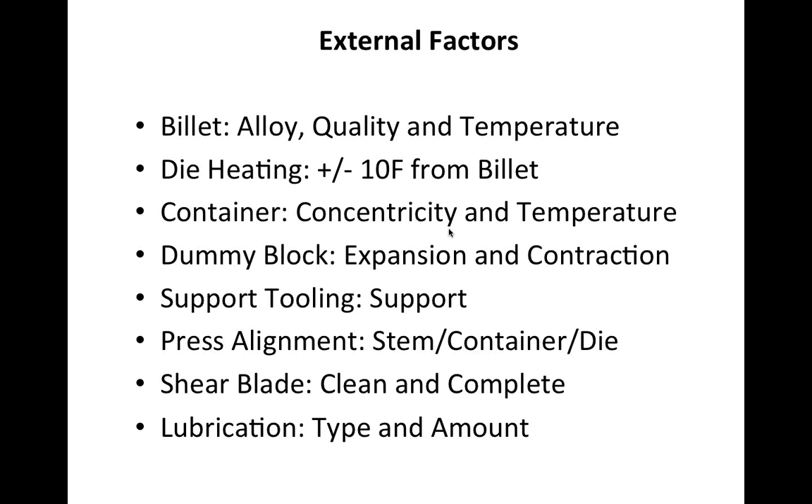Ken, you can talk about billets. So the choice of the billets depends on the application that you would like to use. What determines the application is the wall thickness, the corrosion environment, or ductility of the part that you want to extrude. So that will determine what kind of alloys - 1000, 3000, 6000, or 7000 series alloys.

And for the billet, here are just a quick samples of alloys. For 3000 series alloys, a lot of people who extrude micro tubing will need to use 3000 series alloys because of the wall thickness they are dictated to. For 6000 series, which is more general application - you extrude a lot of it for windows and doors - it's very easy to extrude the 6000 series alloys. And for some high-strength applications, you will look for 7000 series alloys for aerospace and automotives. But there is a minimum wall you can extrude through that 7000 series alloy as well. So it all depends on applications, then it will determine the alloys you should use.

Okay, a couple other things that come in this is the length of the billet. It's not only the alloy of the billet, but also the length. And the length very often is dependent on the table size, extrusion ratio, and the finish size of your actual extrusions that you're selling to your customers so we get the best recovery.

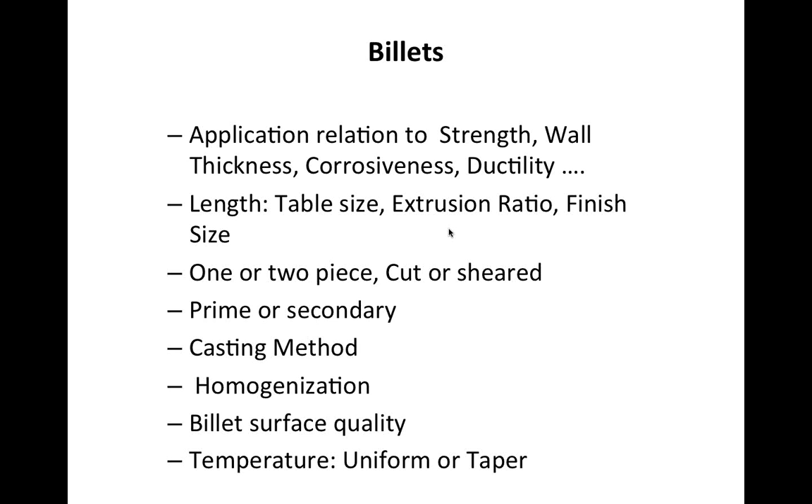One quick thing I'd just like to touch on.

What most extruders realize is that if you're extruding 6000 series alloy and a customer wants to extrude a 10 thou wall, or probably a 9 thou wall, it's impossible to extrude that size wall with 6000. That takes us to maybe a 3000 or 1000 series alloy, which has a lower flow stress and will allow us to extrude a thinner wall.

As tooling vendors, the thickness or aperture between the dummy block and the container wall is very similar to the aperture in the die. So when we go from a 6000 series to a 3000 series alloy and reduce our minimum wall thickness from maybe 25 thou to 10 thou, the critical gap between the dummy block and container wall also changes. Getting a dummy block and liner to operate together as a set is much more difficult when you go to softer alloys.

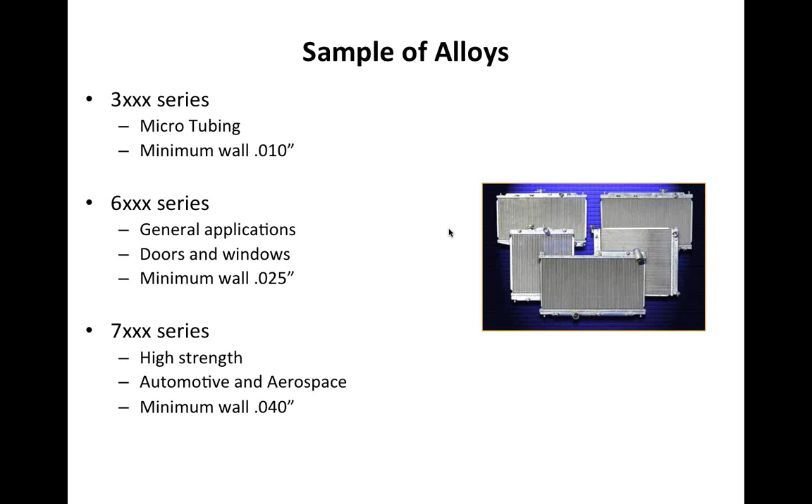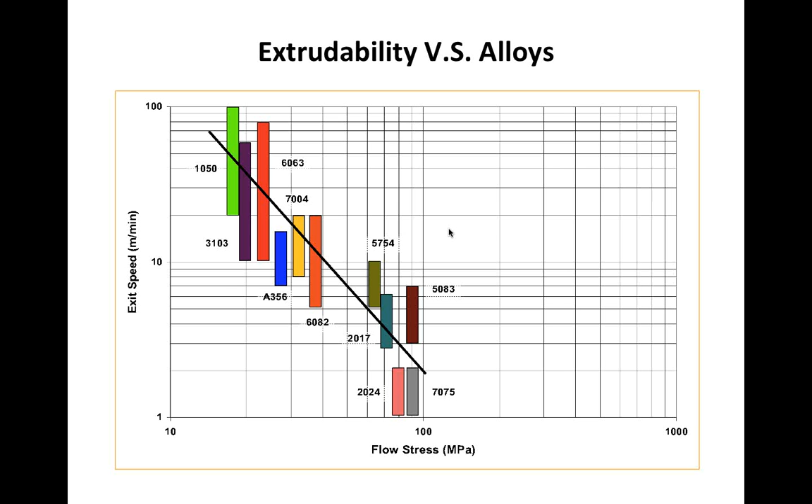So this graph shows you the trend from soft alloy 1000 to hard alloy 7000 series, and their flow stress and extrudability relationships. You're better at that than I am.

Billet homogenization - we won't take much time on it because I'm sure most extruders do homogenize. But if we want to evenly distribute alloy elements, Ken has his PhD in metallurgy and he'd probably speak better at this than myself.

The alloy you have is not pure aluminum, you have all sorts of different elements inside, and what you want to do is nicely dissolve those elements into the aluminum. So you need to evenly distribute the elements, then give it time and temperature, which we call homogenization. What happens when you don't do it is you don't have a uniform property of the alloy, and you have an inferior surface.

Usually on the surface it has high iron content, and because of that high iron content and different uniformity between the surface and core of the billet, there's a strength difference during extrusion. What happens is you get premature tearing at low speed, and you just cannot get the high strength and high hardness through a non-uniform alloy.

At the end of the day, if you don't homogenize it, you are going to lose productivity for sure. No matter how you do it, you don't have a good product to start with, you're going to lose your productivity. So whatever our extruder from two weeks ago hoped to save through not homogenizing, he was definitely losing on both ram speed and recovery.

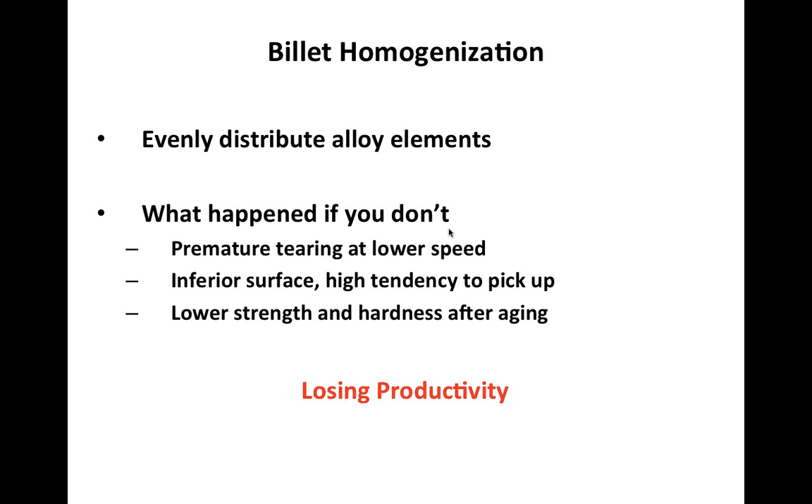Accuracy of billet temperature - the billet temperature has to be within plus or minus 10 degrees of our target. In today's world and with the capabilities of equipment, there's no excuse for not having a billet within 10 degrees of target. As the billet becomes colder, it's harder to extrude because the flow stress of the billet increases. If we want to optimize our ram speed, we have to have control over billet temperature.

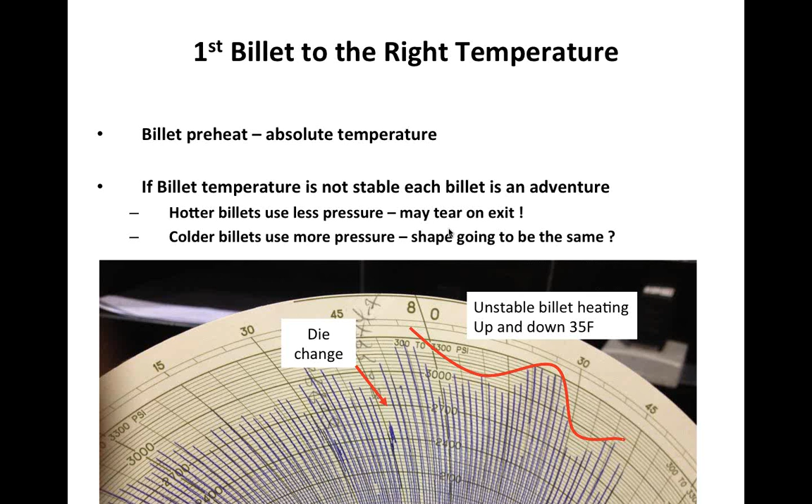Billet taper heating - the goal of every extruder is isothermal extrusion, meaning we'd like to have an optimum and stable exit temperature from the extrusion press. If we start with a uniformly heated billet, the only way to get a stable and uniform exit temperature is by varying our ram speed. But if we vary our ram speed too much, we're also going to change the deflection of the die and the opening in the aperture, which changes our shape, wall thickness, and speed of aluminum flow through the die. So it's virtually impossible today to have isothermal extrusion at 100% ram speed.

So the only other way to do it is to taper heat the billet. And I just saw we did it in Celsius instead of Fahrenheit.

Most of the new presses offered today offer a maximum of 100 degrees Fahrenheit taper in a billet, or 50 degrees Celsius. The reality is to attain isothermal extrusion today, we're looking at tapers anywhere from 100 up to 300 degrees Fahrenheit. I would say 300 degrees is extreme, but there are extruders today using up to a 300 degree taper on the billet.

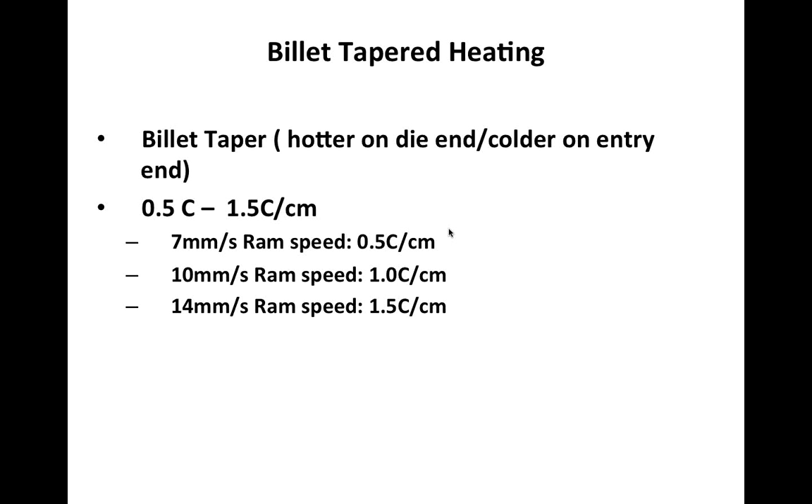Die heating: we would like to have the die plus or minus 10 degrees Fahrenheit from the billet temperature for the first push. If the die is colder than the billet, it means that you're going to increase the stress on the die and create scrap.

So temperature matters. On the other side, if the die is inconsistent from top to bottom or left to right, the flow rate through the die will be different, which means that the shape and wall thickness will also be distorted from what we want.

We know that H13 or 2344 anneals at about 1,085 degrees Fahrenheit, and we know that the nitride layer on the die bearing starts to degrade about 1,098 degrees. So when we're heating the die, we want to make sure that we never go above these temperatures.

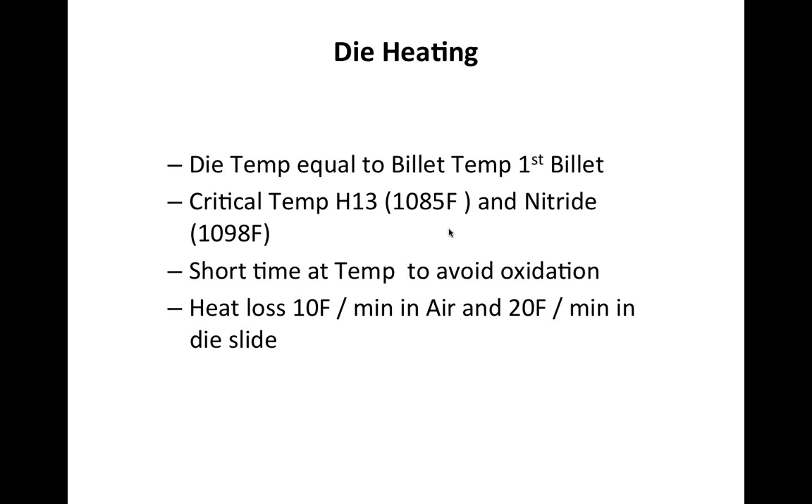Unfortunately, more than 50% of the global extruders today still use chest ovens. And the reality is, to heat a die in a chest oven, we have very little, if any, control over temperature. The majority of these dies are left at temperature for too long, causing oxidation and surface finish problems.

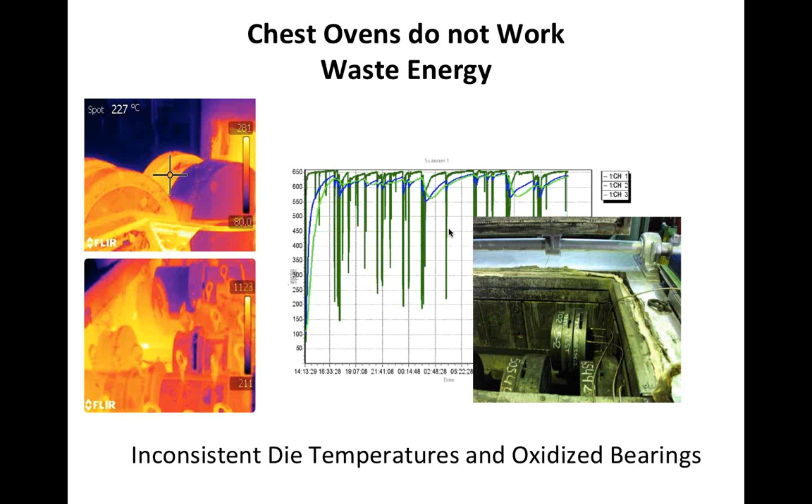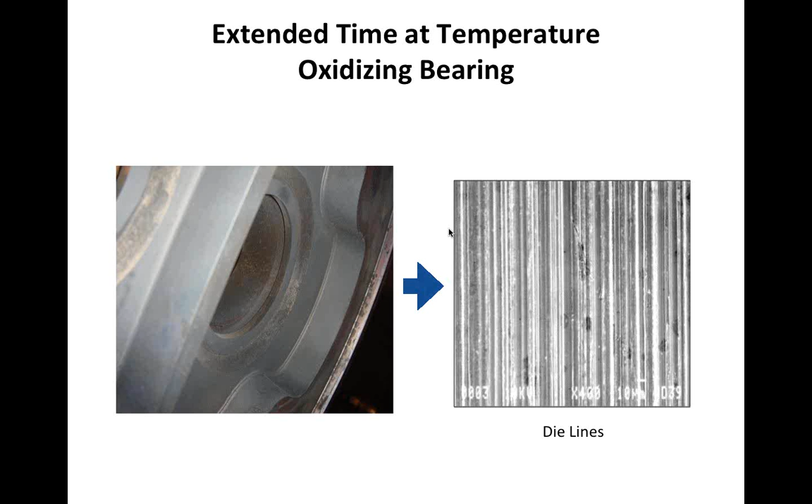This is just a quick look at a die that's been in a die oven for more than 8 hours. You can see through the microscope that it's caused oxidation on the die bearing and die lines on the profile.

Single cell die ovens today, I think, are accepted as the best way to heat a die. We get 100% control over die temperature without overheating the die, and can more or less guarantee that the die will be plus or minus 10 degrees Fahrenheit, or 5 degrees Celsius, from billet temperature.

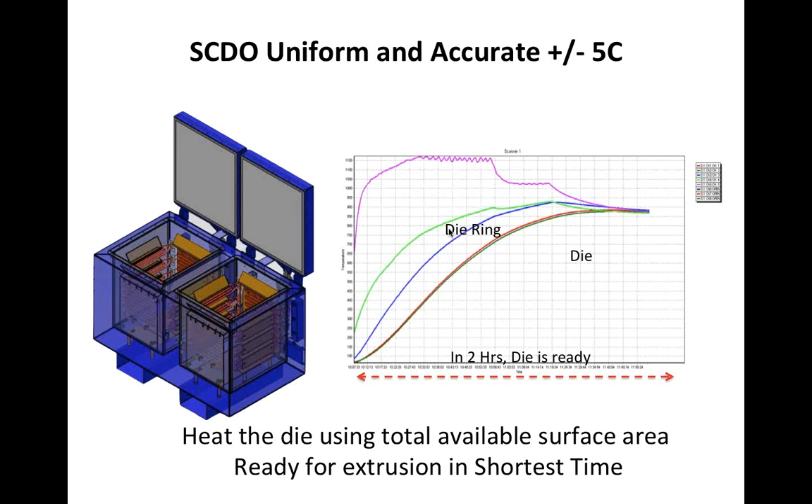It also allows us to control time at temperature, even in cases where we have dies that are 35 to 40 inches in diameter. Today we can heat them in somewhere about 5 to 6 hours, which still gives us time to extrude.

So imagine that if you don't control your temperature, the flow stress of your alloy in the same die, in different cavities, different port holes, will be different. And that's going to create a lot of problems, and also a problem in the profile and thickness as well.

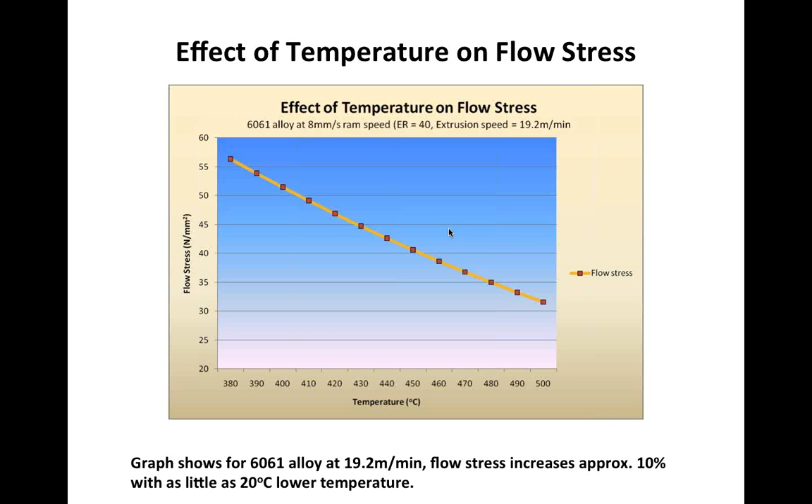Next, containers. Really, the only part of the container that affects extrusion is the liner. We would like the liner to be about 50 to 100 degrees less than your billet temperature. This gives us the ability to control the flow of the surface of the billet into the die.

As the liner temperature starts approaching billet temperature, the flow of the inverse segregation or oxide layer on the outside of the billet will start flowing very freely into your die. If it was possible to have the liner too cold, maybe 200 degrees below billet temperature, we could actually pull the surface of the billet back and have something called coring, or type B inflow.

We also want the liner to be round. If the liner is bellied in any way whatsoever, we're going to get a collection of billet surface and oxides on the inside of the liner, which will be released into your profile at random, causing surface finish problems, non-metallic inclusions, and mechanical inconsistencies in your product.

We also need the liner to be concentric to allow the dummy block to work. If the liner isn't round, it's impossible to have a dummy block operate efficiently.

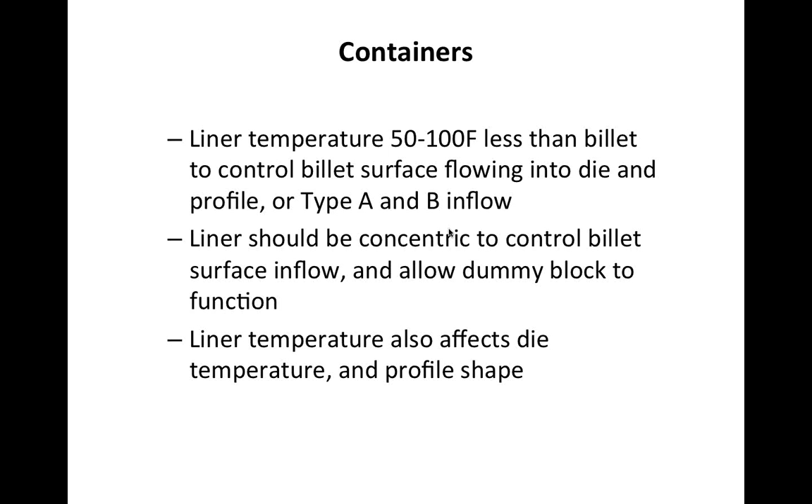If this is the case, once you have conduction between the liner seal face and the die, the top of the die will become hotter than the bottom of the die. The flow stress of the alloy at the top of the profile versus the bottom will be less, and we'll have more flow, which is going to cause us inconsistent shape and also wall thickness.

So the key for the container is the thermal stability of the container, not the thermal or temperature uniformity.

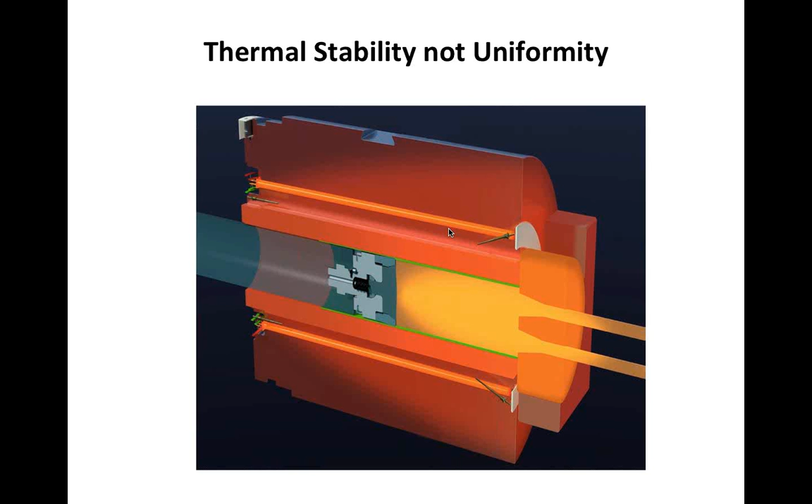So we've discussed a lot about temperatures, and the temperature of the liner will have a very dramatic effect on the skin of the billet flow. If the liner is hotter than the billet, you will have a type A inflow. If the temperature of the liner is colder than the billet, you will have a type B inflow. What's more interesting is when I go to extruders and ask, do you know what your liner temperature is?

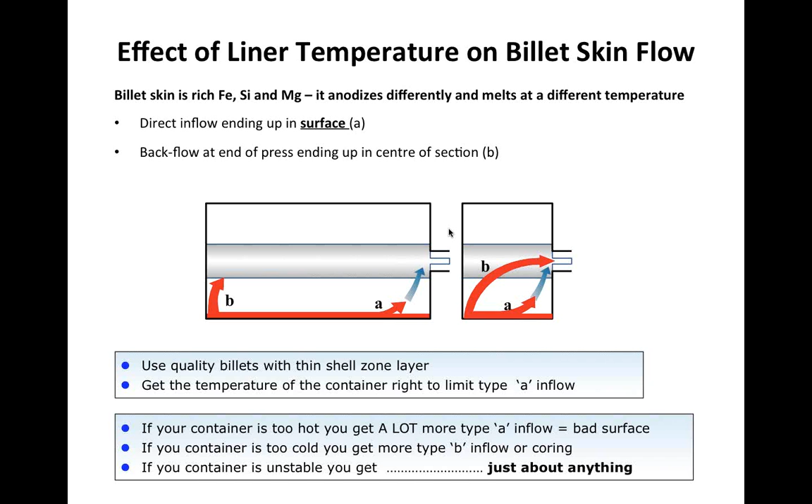Most of the time, 95% of the time, they do not know. They only know the reading from the thermocouples. So anything can happen in their container because the container temperature, or liner temperature, is not stable.

Typically when we look at the thermocouple reading, it only tells us the minimum temperature. So if you set the thermocouple in your container at say 800 or 820 degrees, below billet temperature which may be 860 degrees, the only thing that thermocouple does is turn the heaters on when the container is less than 800 or 820 degrees. There's no control whatsoever at the temperature above that.

What's interesting is there's actually a better way to control the temperature of the container or liner. The only thing you have to rely on is this simple physics formula: look at the heat coming in from the billet, heat generated through the deformation of the extrusion, and heat going into the extrusion profile or going to the die. The rest of it should go to the container.

What this formula tells you is there are only three things that matter most: temperature gradient, conductivity of the material you're going to use for the container, and how much surface you allow the heat to flow through.

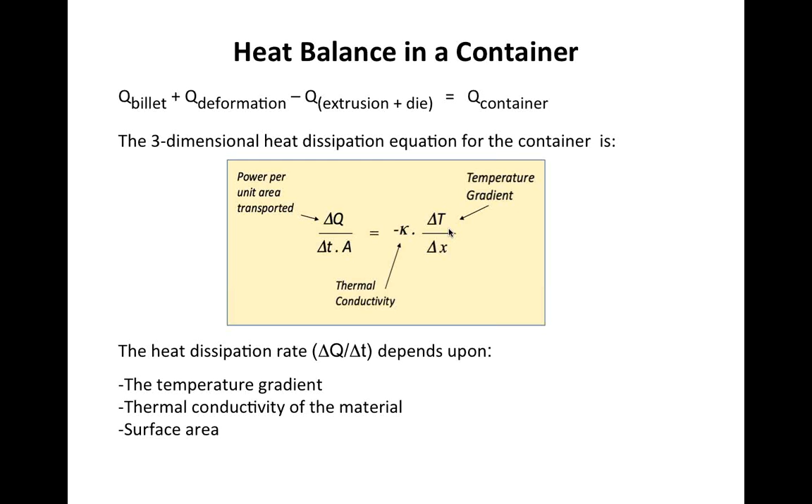When you look around, or maybe look at your press, take a look at your container designs. Typically there are three different container designs. On your left, you have a heater from the outside providing heat to the container—we call it design 1. Or you can have a heater inserted usually in the center of the mass of a container—we call it mid-section, or design 2. Or, we think it's a better way to provide heat to the most important part, which is the liner. We move the heater close to the liner, which is a QR container, or design 3.

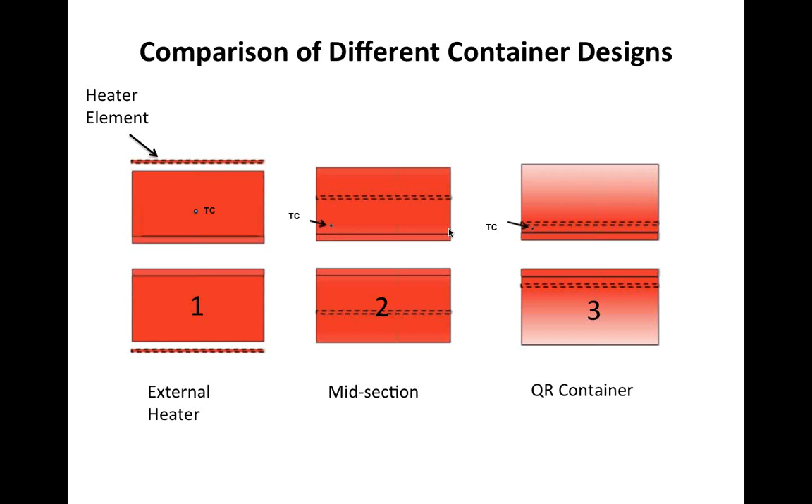We did a simulation on these three different designs, and the graph shows the first factor that controls temperature stability in the container: temperature gradients. You can see design 1, the gradient changes from positive to negative about every 100 billets, meaning the gradient is changing all the time. Design 2 has a big fluctuation every 15 billets or so. Design 3, when you move the heater close to the liner, is very, very stable.

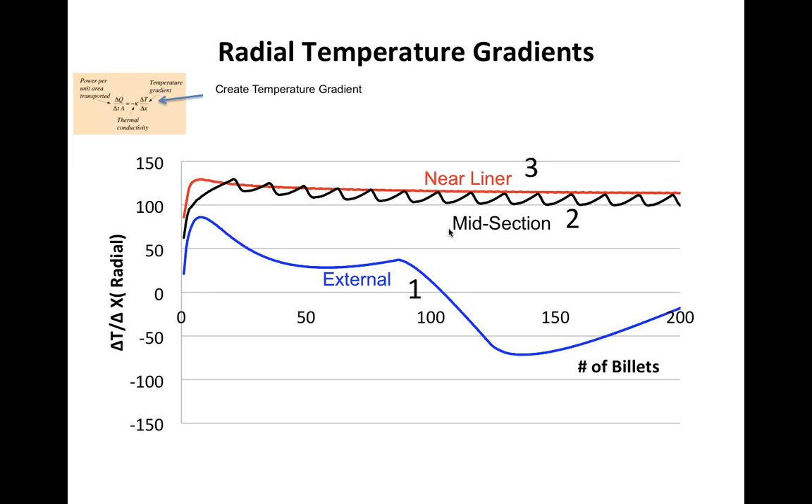If you pick the right steel for the container, we would like to see high thermal conductivity coupled with high toughness. The choice comes down to AISI 4340 steel, which has 60 megapascal of fracture toughness and 42 watts per meter per Kelvin thermal conductivity. That's almost double the thermal conductivity of typical material like H13 or 1.2344, and also double the toughness of those materials.

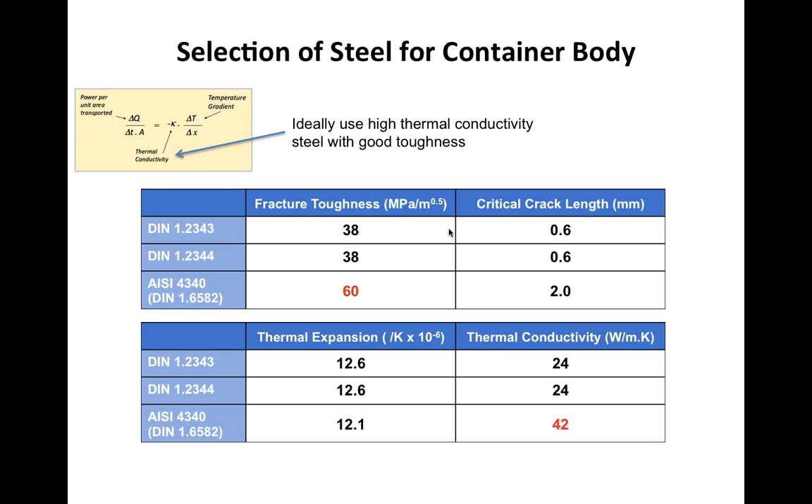When you combine thermal temperature gradient and thermal conductivity, you see right away which one is the winner: the red one, design number 3. It has a very consistent heat dissipation rate compared to design number 1, which fluctuates from positive to negative when heated externally, and design number 2, which fluctuates and has about half the capacity to dissipate heat.

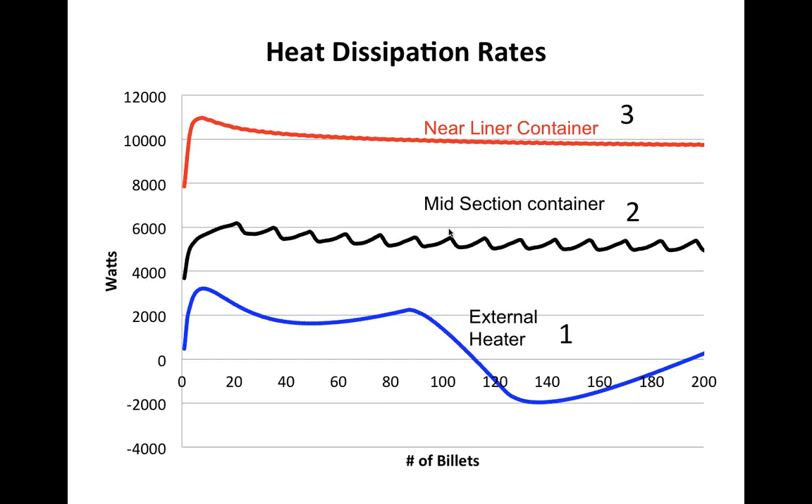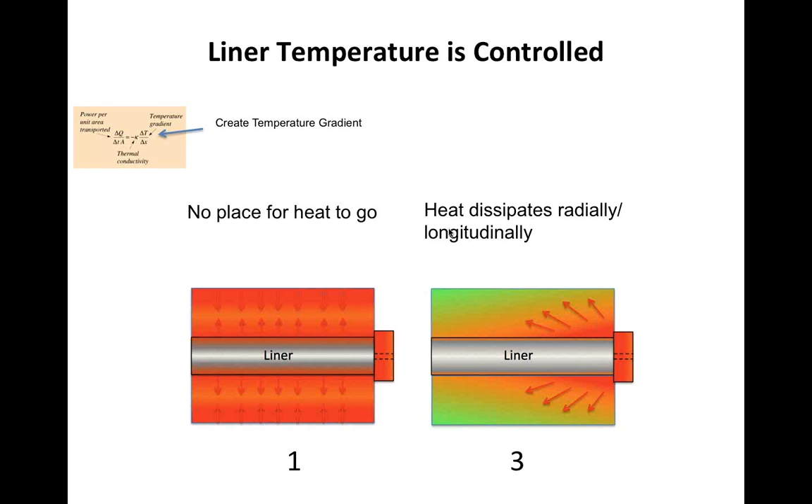What we want is the temperature of the liner to be controlled. If you start with a uniform container, there's no place for heat to go, so you cannot control the temperature because you have no temperature gradient. We want a temperature gradient and high thermal conductivity, and when necessary, we'll provide surface for the heat to flow.

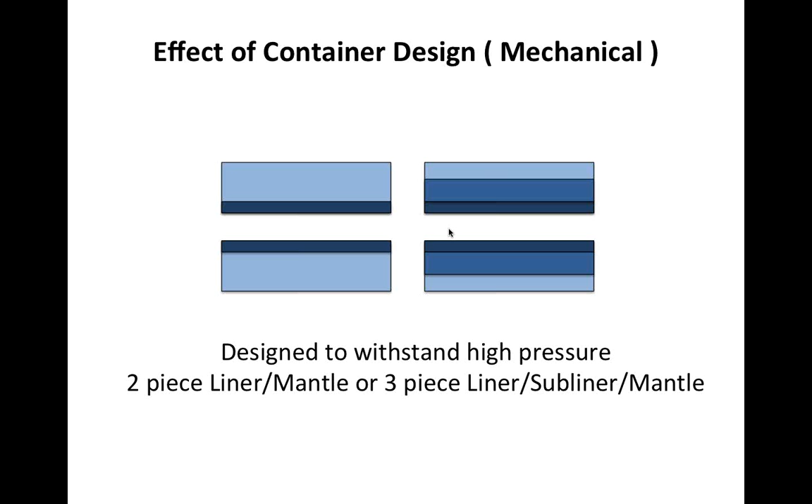When we look at the construction of the container, how strong or the integrity of the container, typically people will say they have a 2-piece container, or sometimes a 3-piece container, but the reason behind it is not clear. I think the reason behind this 2-3 pieces is because it depends on the extrusion pressure.

Today, containers are getting much longer. In these long containers, we typically go with a 3-piece liner so we can control the deformation or mechanical expansion of the liner, or when we're in high pressure. Very often today when we go to long billets, we also go to high pressure, and the combination of high pressure and long billets means we have to have 3-piece containers.

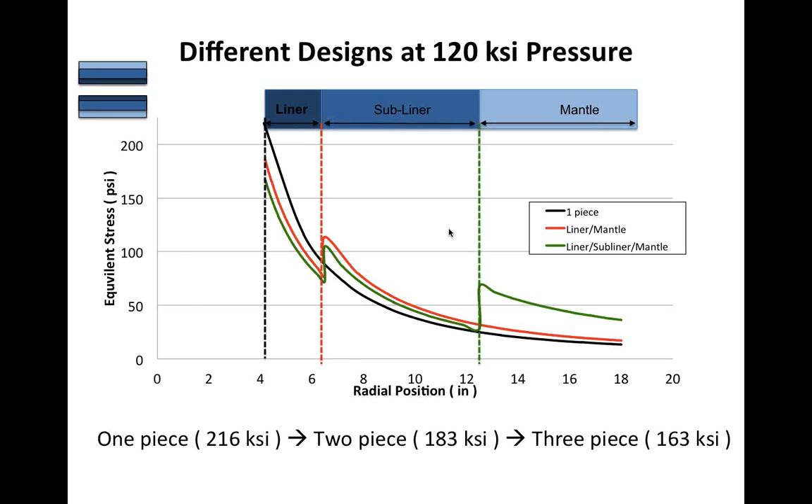Remember we're talking about when you need supplementary cooling, and now you have a choice of where to put the additional surface for air cooling. Sometimes we see people like to drill holes in the container, which is a very bad choice because you provide the container some stress riser at high stress areas. If you really need extra cooling, the choice is to put it on the OD, because the OD of the container has low stress during extrusion and higher surface area.

If you pick the same size container and simply move the cooling hole or cooling channel from the liner to the OD, you would quadruple, or increase 4 times, the surface area. But then you will need to use high thermal conductivity steel to conduct heat away from the liner to the surface. Typically, this is only done with microtubing, or in some cases, some 7000 series alloy extrusion.

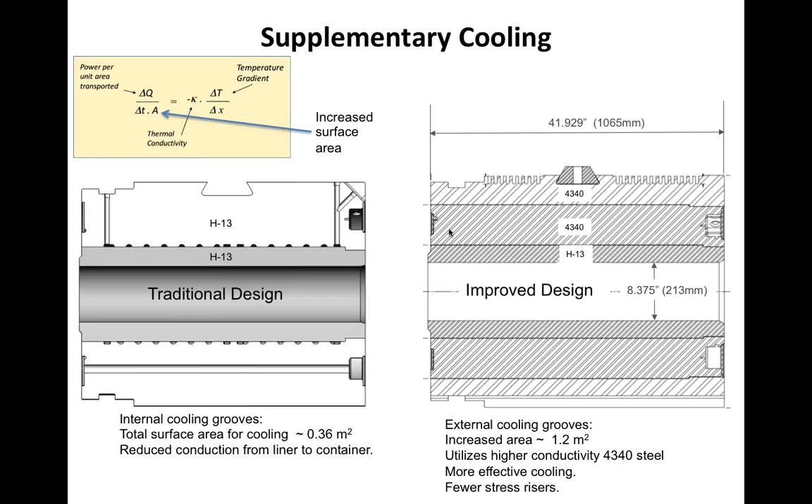Dummy blocks. Typically, the clearance at room temperature between a dummy block and a liner is anywhere from 35 to 60 thou on diameter. The majority of dummy blocks in the market, or fixed dummy blocks in the market today, expand anywhere from 25 thou to 40 thou on diameter.

What we focus on is the billet skin thickness generated during extrusion. We don't want to run steel on steel, and we don't want to extrude between the dummy block and the liner. We would like to manage the skin thickness somewhere between 8 to 12 thou. If you look at an 8-inch diameter billet by 40 inches long, the actual skin weight should be somewhere around 400 grams or 1 pound.

The biggest problem with dummy blocks is plastic deformation or creep.

We would like the dummy block to expand to the 25 to 40 thou and come back to as close as nominal for as many times as possible. By doing this, you can extend the life. One of the biggest problems in dummy blocks today is container liner concentricity. If your liner is bellied, your dummy block life is going to be minimal. If your liner is overexpanding so that you have high pressure or a very long billet, you have to make these containers typically in 3 pieces to manage the mechanical expansion of the liner at temperature.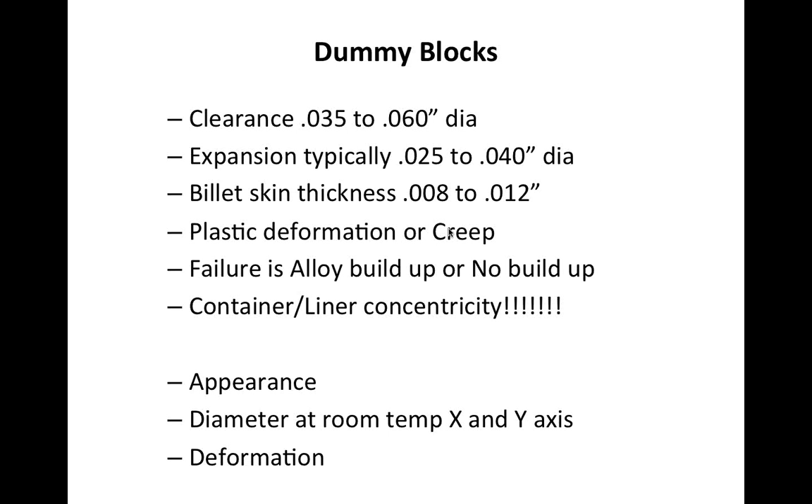Okay, function of a dummy block. I think I went through this pretty good. Let's go to the next one.

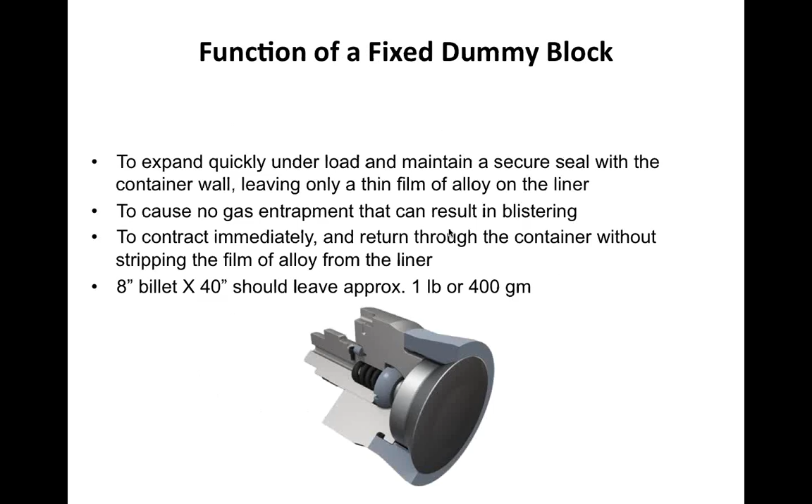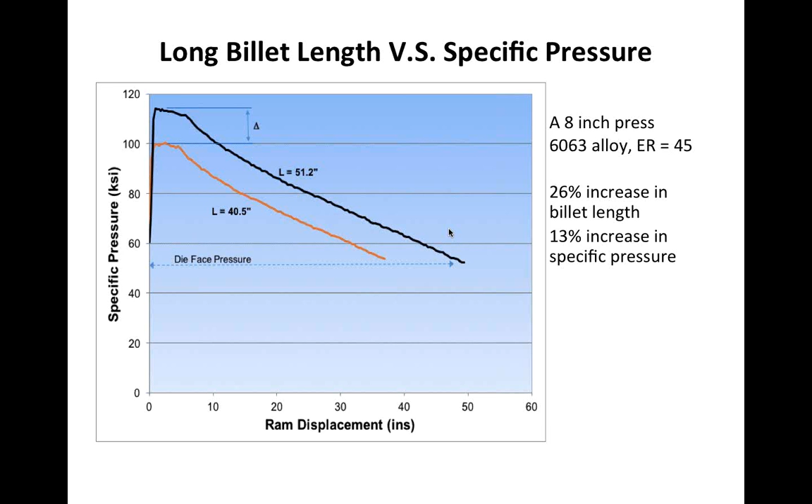One caution: we're running into billets up to 60 to 65 inches in length today. As the length of the billet increases, to maintain breakthrough pressure on the die, we're seeing pressures increase anywhere from 10 to 20% from what we used to see. In these cases, the face pressure on the dummy block and also the container is above what dummy blocks and containers are typically capable of. If we take a dummy block that can function properly at 100,000 psi, increase the length of the billet by 10 to 20 inches, increase the pressure by 10 to 15%, the dummy block will fail.

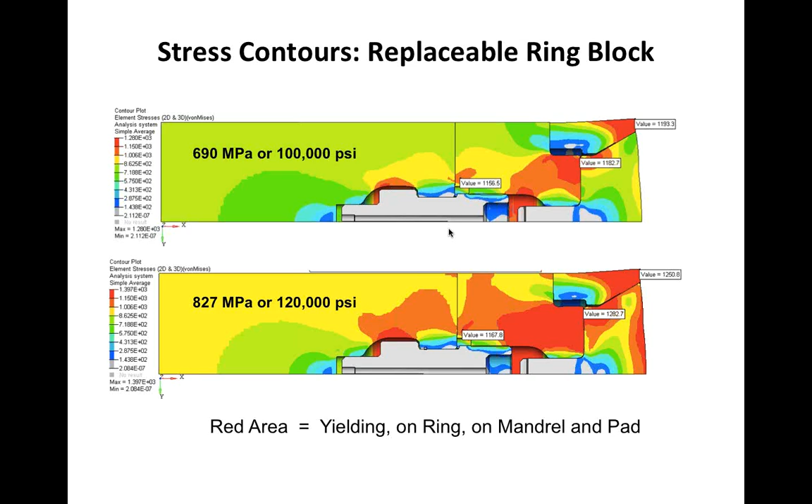And by fail, we mean plastically deform. There are some dummy blocks on the market today, both European and North American, which are capable of functioning at the higher pressures. In these cases, you need to look at a high-pressure container and also a high-pressure dummy block.

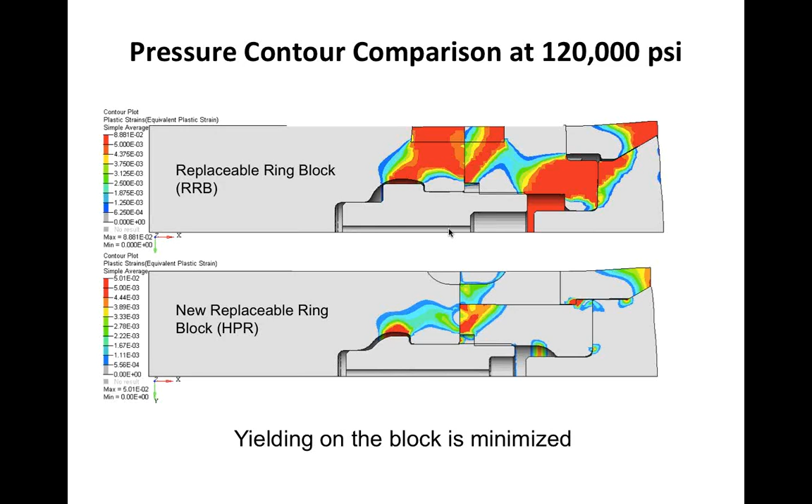Cleanup blocks: number 1, if you don't use a cleanup block, you have a problem. And if you use a cleanup block and nothing comes out of the liner, no skin is left, you also have a problem. We want the dummy block to leave a skin on the liner somewhere 8 to 12 thou. If the liner is anywhere from 50 to 100 degrees Fahrenheit less than your billet temperature, the difference in expanded diameter between the dummy block and the liner will allow the skin thickness. If you don't have this skin thickness, you're going to be getting surface defects on your profiles and blisters definitely in the back of your billet or profile.

With best practices today, we typically have 2 cleanup blocks per press. The press operator has 1 cleanup block that he uses each time he changes alloys, and the other cleanup block is typically in the hands of the die corrector, which is used 1 time per day, usually first thing in the morning. When the die shop runs the cleanup block, the first thing he does is he doesn't use the butt shear on the last die prior to running the cleanup block. That die is taken off. Once it cools, he measures the OD of the die or the die ring to the butt to see the concentricity or alignment between the container and the die.

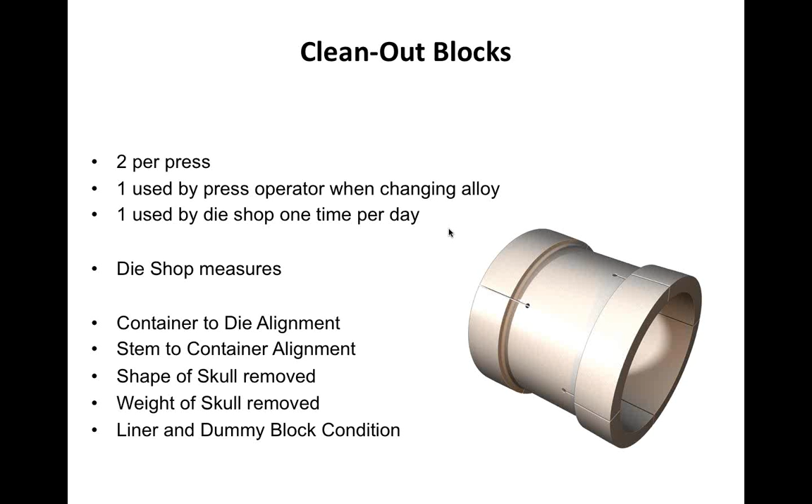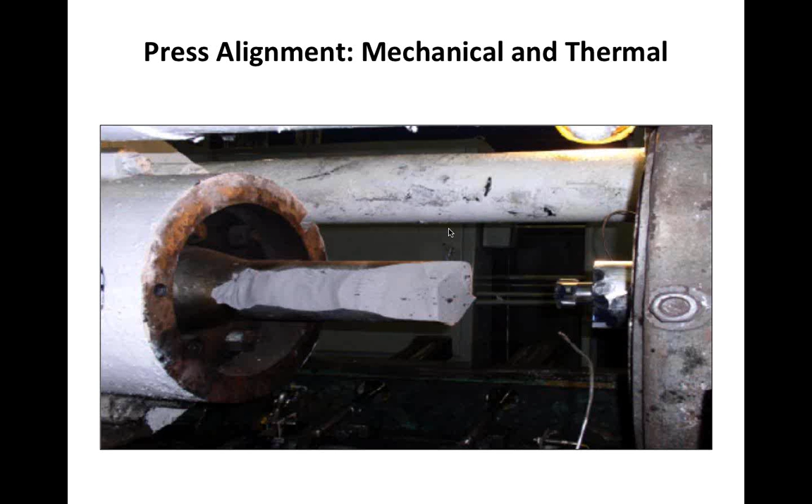Through the practice of the cold cleanup block, you can see the press alignment. And the picture that you see is because of inadequate press alignment. It's horrible, not just inadequate. The problem in poor alignment is you're going to get speed differences in multi-cavity dies, which means the run out from one side won't be uniform with the other. We're going to get flow differences into the shape. We're going to get inflow or something that looks very much like the liner is too hot. Alignment also causes this.

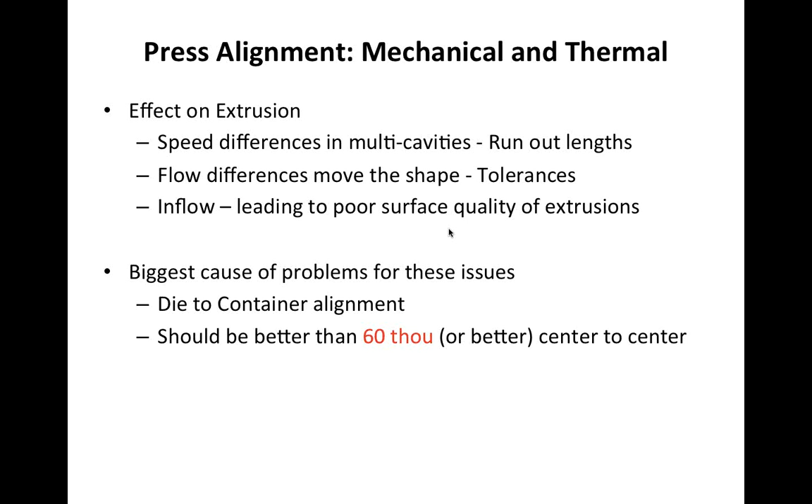Today we'd like to keep alignment, I would say 60 thou is being kind, 40 thou is probably better. By 40 thou alignment, we mean 40 thou at temperature. Alignment should never be taken with a cold tooling stack, cold container, etc. It needs to be at operating temperatures.

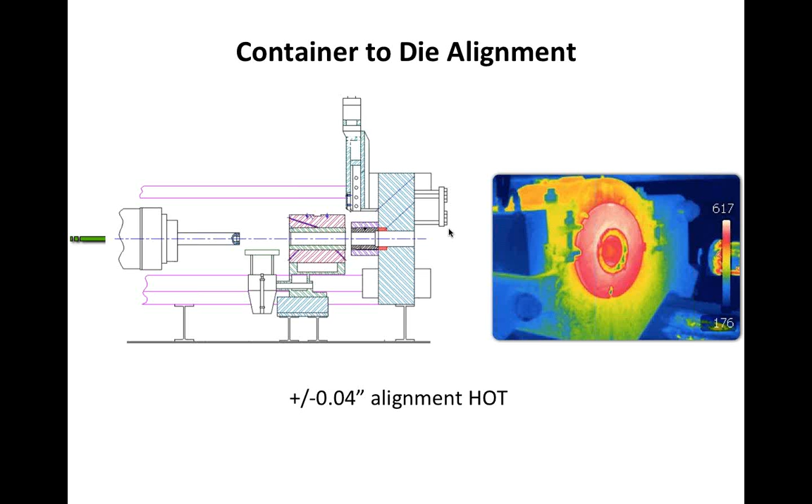We have 40 thou here instead of 60, which I prefer. You can see in the thermal image on the right-hand side that the container housing is hot, and the top of the container housing is about 100 degrees hotter than the bottom. So we have a lot of things going on here that we hope not to see.

The problem with the container housing is it's big, and it's made of metal, and the metal can expand at high temperature. So if you don't control the temperature of the container housing, it moves around by its own will, because at the start of extrusion and at the end of extrusion, it just moves around. And then you can easily look at the thermal expansion coefficient and look at your container.

For example, we saw from the thermal imaging that the top of the container is hotter than the bottom. Look at your container and you will see how much it's moving if you don't control the container temperature. If you're using external heating elements and only extruding 5 or 6 days a week, on Sunday those heating elements run at 1,000 to 1,300 degrees Fahrenheit to maintain your container at 820. The container housing on Monday morning will be more than 800 degrees. If you run 24 hours a day until Friday, by Friday afternoon your container housing will typically be maybe 300 degrees Fahrenheit. If we change the container housing temperature by 3...

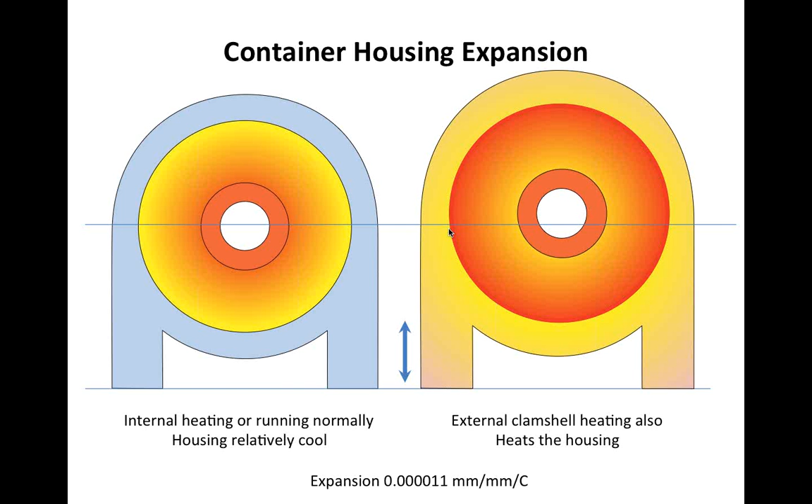We just want to touch quickly on support tooling. Support tooling needs to be adequate for the alloy and size of die and pressure that you're extruding at. If the support tooling is not flat, controlled as far as tolerance and size, you will get deflection in the die.

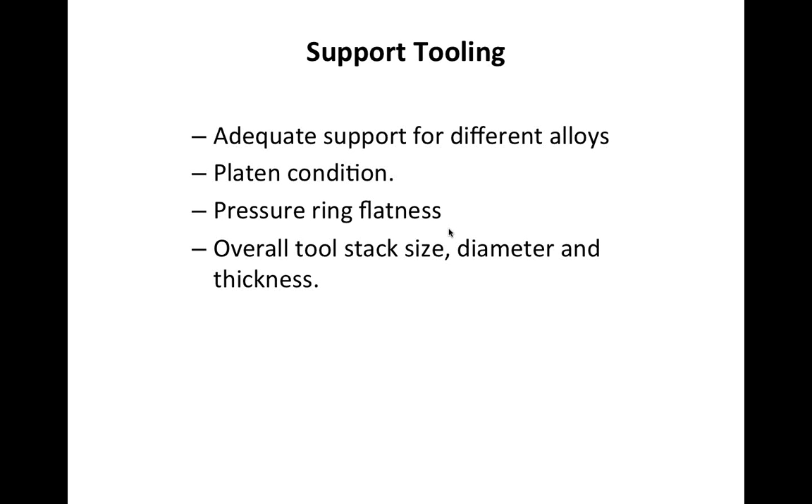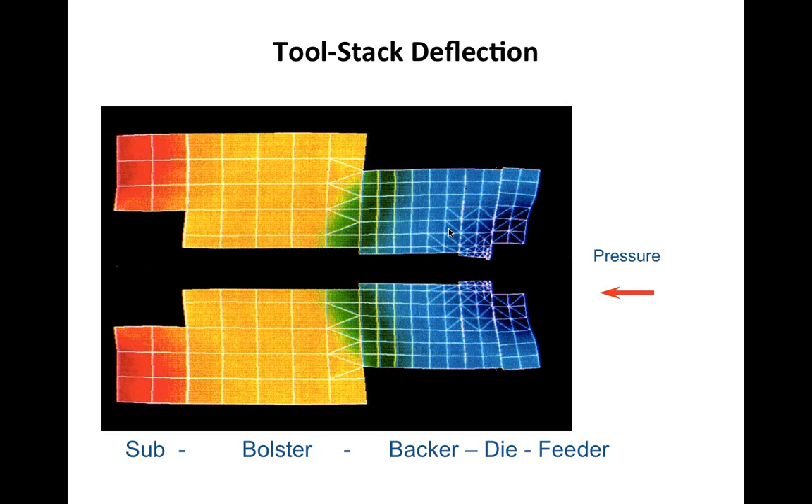This is a simulation you see from the feeder to the die, backer, and bolster and support tooling. The deformation is there. So if you don't have a good support of the tool stack, the dimensions of your profile is going to be different. It's going to change all the time.

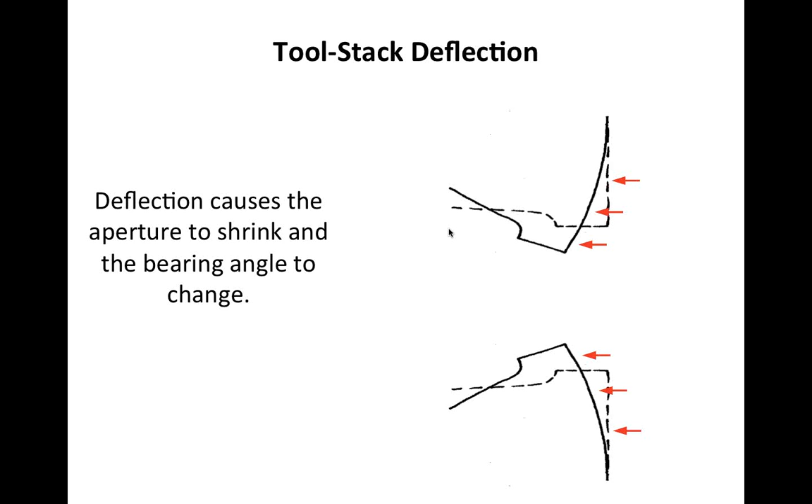And if the aperture is deflecting, your bearing is going to be losing control. You're going to be extruding at a faster rate of speed than you'd like to, and you're possibly going to get pickup and shape variation.

Shear blade design also matters. Typically there are maybe 4 different types of shear blades. We can run scoops, blunts, knife shapes, and some run a delta shape as well. The first thing we look at is the thickness of the butt, whether it's less than an inch, between 1 to 3 inches, or over 3 inches. Typically this is driven by the structural integrity of the profiles that you're extruding.

It's also affected by the temperature of your liner. If your liner is too hot, you're going to be collecting a lot more oxides in your butt, and hopefully you're running a thicker butt, because they have to go somewhere.

What we want to do is have a clear cut and a complete cut on the die face without pulling any aluminum whatsoever from the ports. If we pull alloy out of the ports and have air gaps in these, the next billet that comes in will create blisters in these areas.

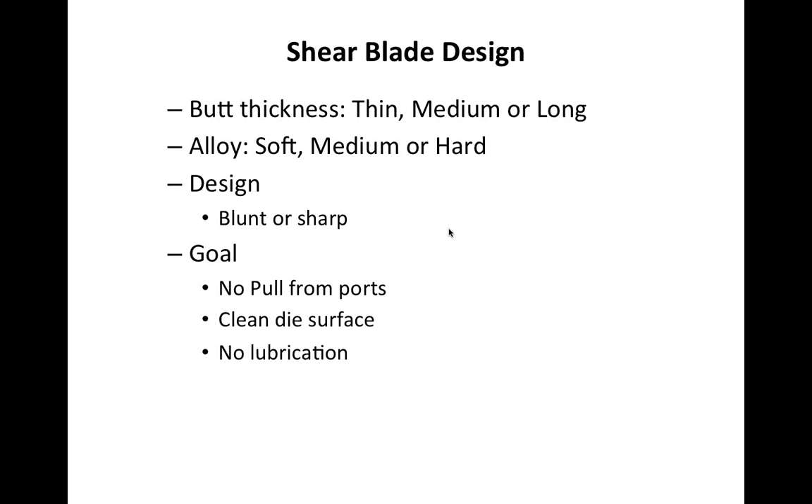Typically, when your butt shear isn't working well, people are also adding a lot of graphite lubrication. Air plus oil or graphite makes explosions, and again we lose the structural integrity in our profile.

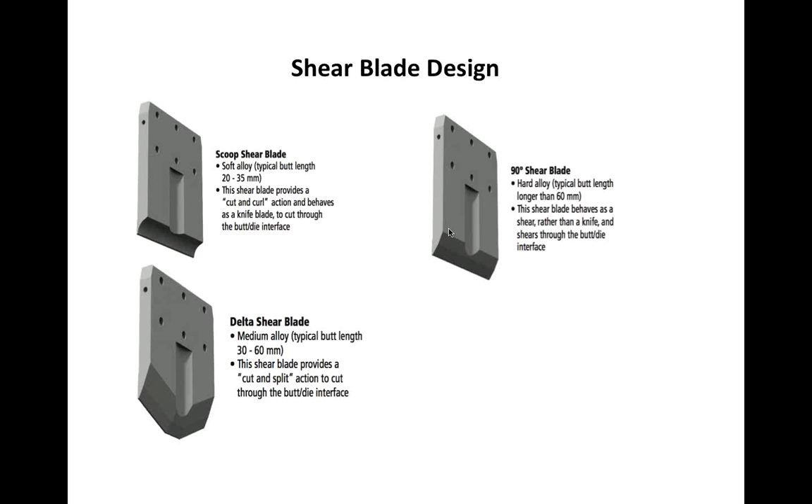These are just three shapes here. On the top left we have a scoop, which we can use for relatively thin butts, usually 6000 series alloys. On the right is more of something we'd use for a 7000 or 5000 series alloy, which is relatively blunt.

Lubrication, if we go back maybe 20, 30 years ago, we started with graphite, then moved into acetylene, then powdered boron nitride, then liquid boron nitride, and today the preferred lubricant is soap. Soap is relatively inexpensive, user-friendly, environmental, and has very little, if any, effect on the profile. The good news is the wetting surface is about 1100 degrees, which means when we apply it to the die, seal face, billet, or butt shear, we get no smoking or no dripping.

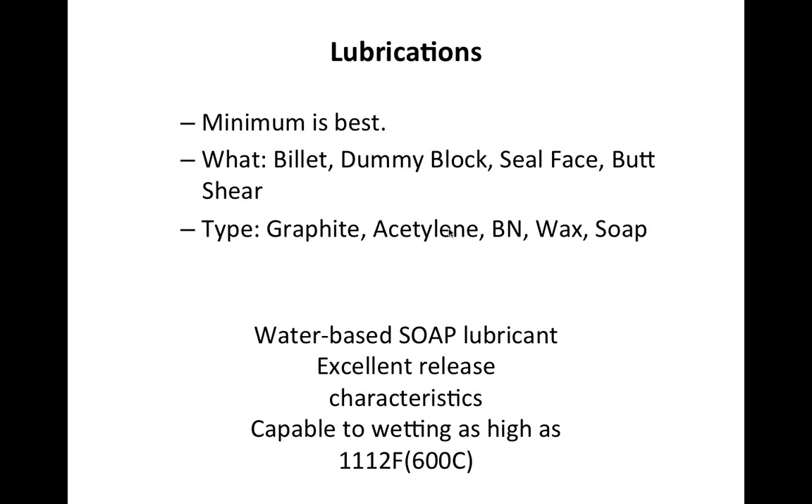Thank you so much, Paul. That was a great presentation.

Any questions? Sorry, I have an echo going.